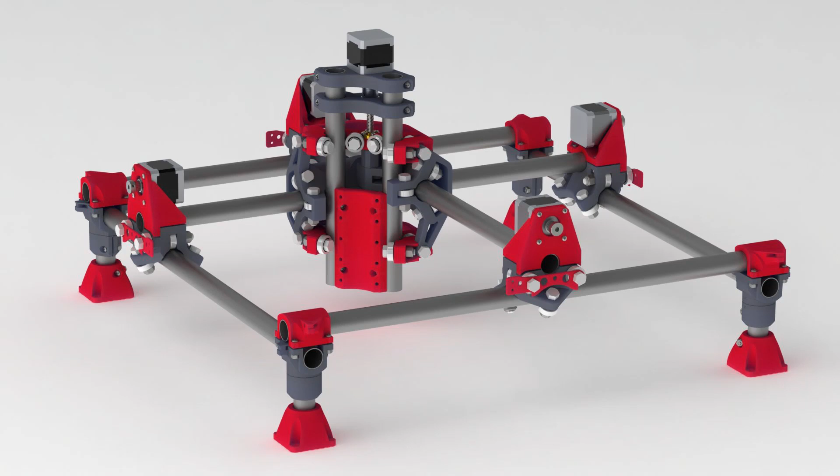This machine is designed by Ryan Zellars. He has an official website where you will find the full details and information about the machine and its parts. Also, you will find the forums for support by the designer himself and other community members around our machine.

Also in the website you will find other products like the Low Rider, the bigger brother for this machine. Also in the website you will find the store page where you can buy the 3D printed parts, electronic kits, or mechanical kits from there.

As in the title of this video, we will talk about this machine and what you need to know before you build your own machine.

I will show you first some examples of applications you can do with this machine, so you will have a wider view. The first example is the main usage for this machine, as the name says, CNC machine. So you can mill wood or other materials with this machine.

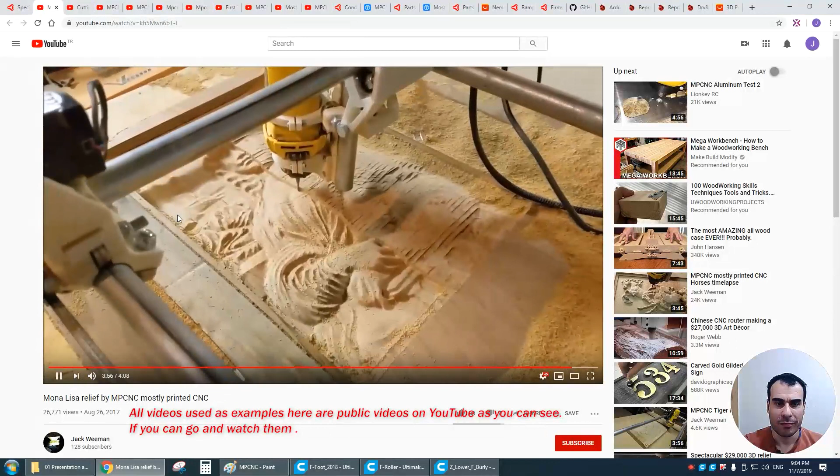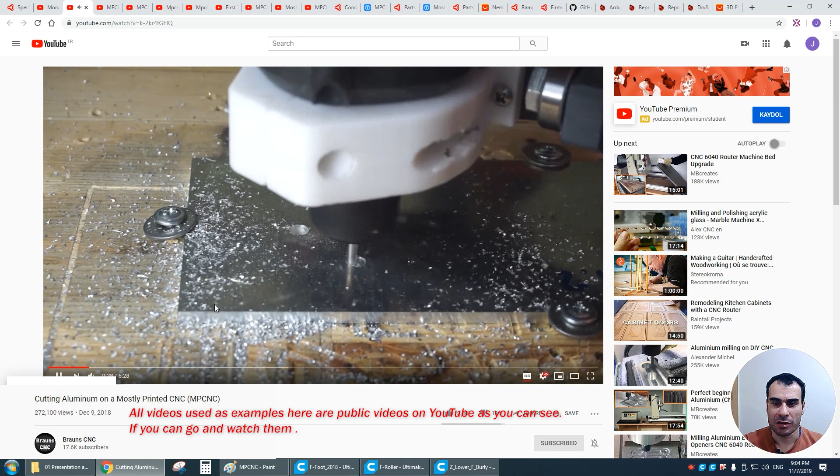I'll show you another example for milling. This example is also milling, but the material here is a sheet of aluminum. Also the machine is doing very well.

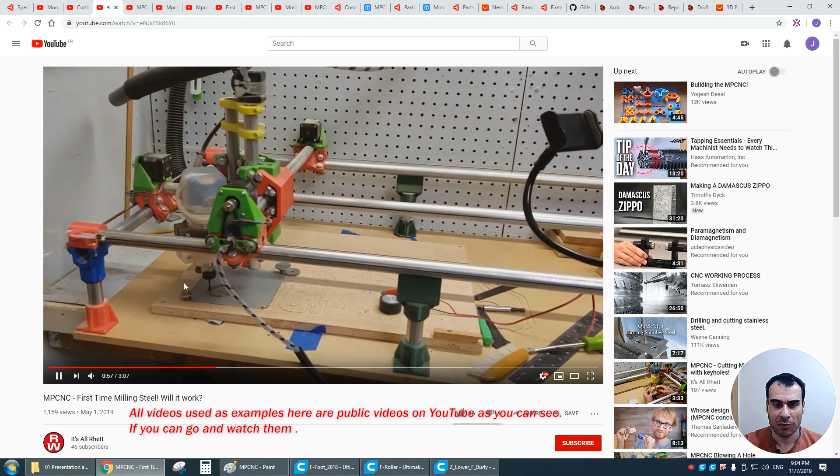We have another example for metal materials. Here the title says it's milling steel, and the machine is also doing very well.

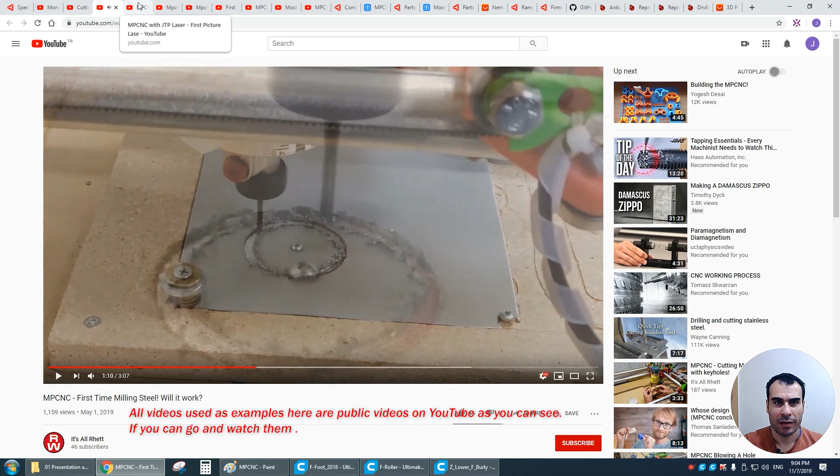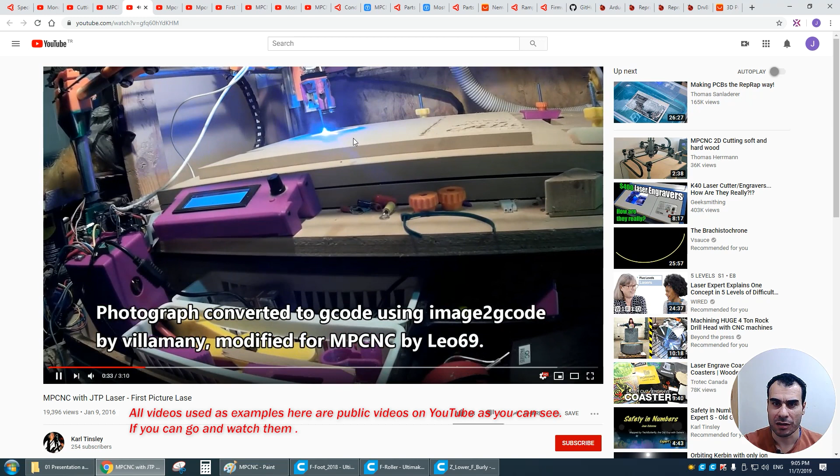We have another usage for the machine. Also the user here attached some laser diode to the gantry, and the machine is working as a laser engraver or laser cutter. We will have another example here.

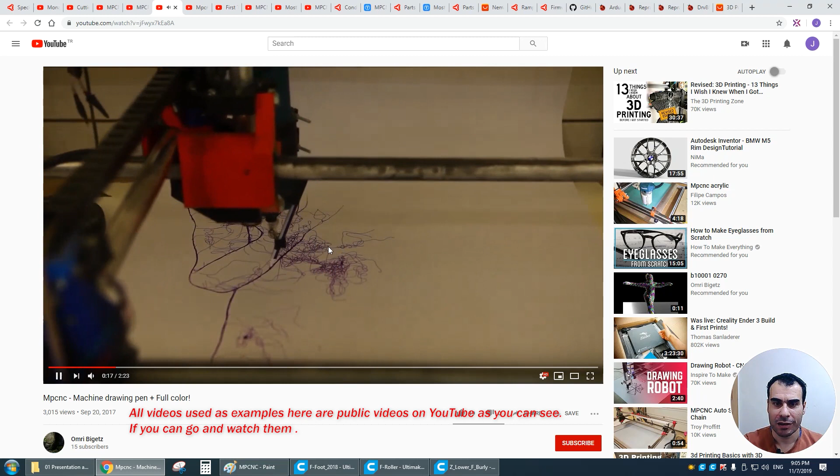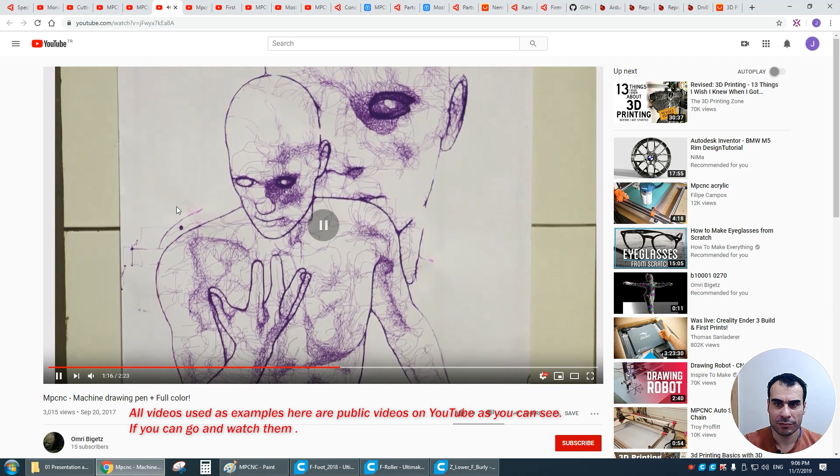The user attached a pen to the gantry, and the machine is working as a plotter or drawing machine. Here is another example for drawing. As you see, just attach a pen to the gantry and the machine works just like a normal plotter.

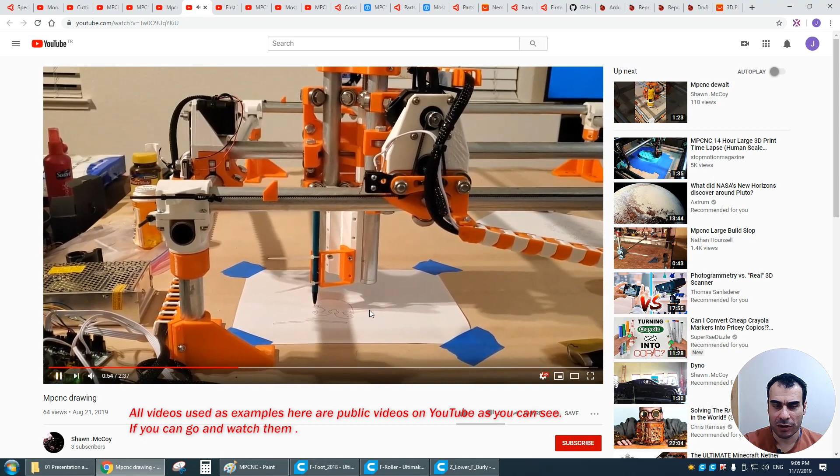For the G-code, the command set by the electronics, we will find it later in coming videos.

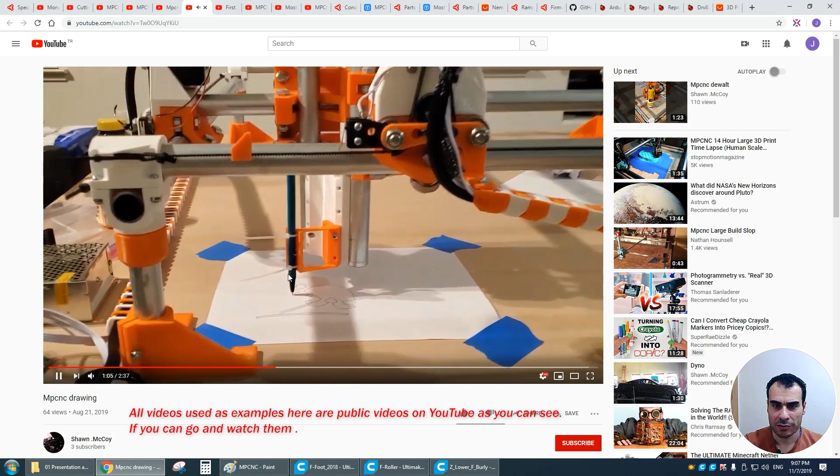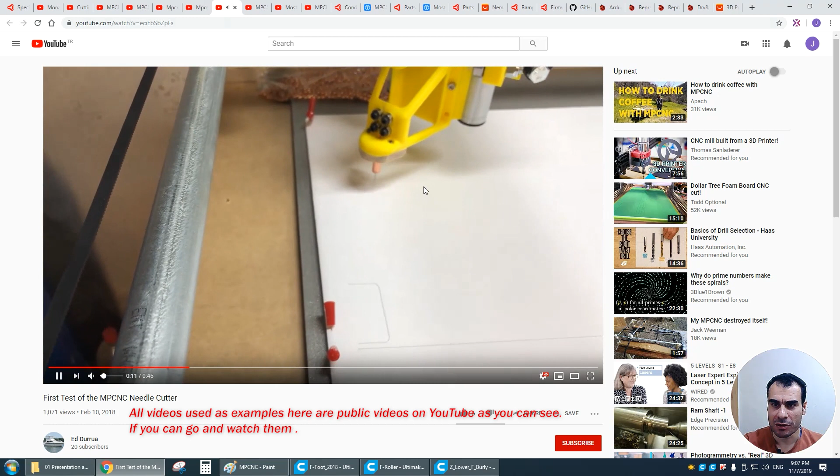Also, here we find the user attached some new invention in this community. It's called a needle cutter. Some motors, high-speed rotation motors with a needle attached to it, used to cut foams or soft materials like it.

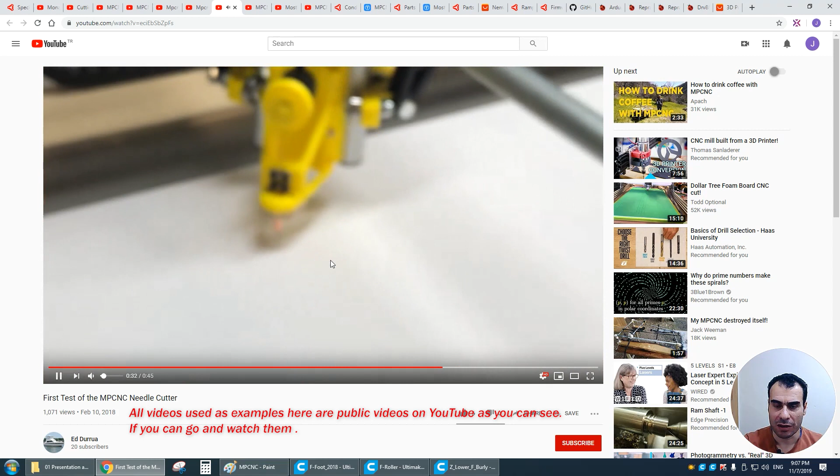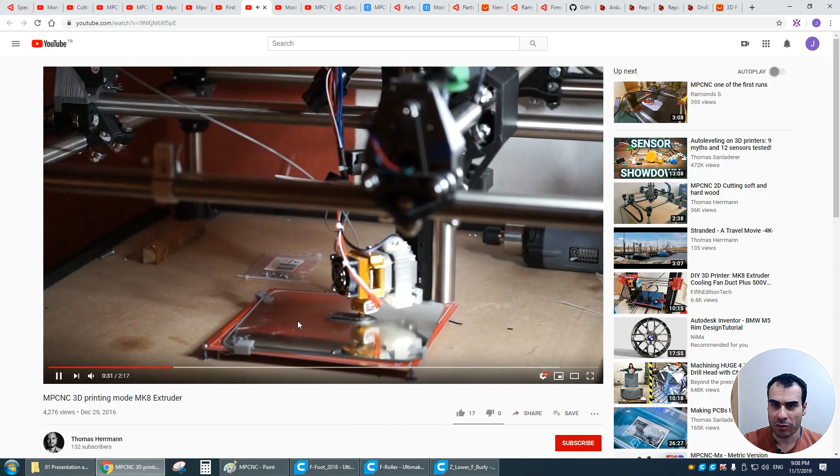Here we see that they attached a 3D printing head to the gantry, of course with some build plate. It worked as a 3D printer, a normal 3D printer.

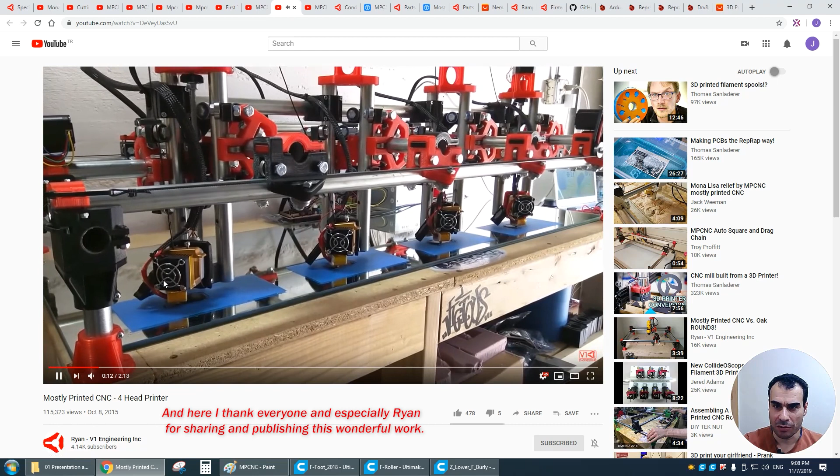Here in this design, the designer Ryan himself attached 4 heads of 3D printing to one machine, and it's a very genius solution to do continuous jobs like this.

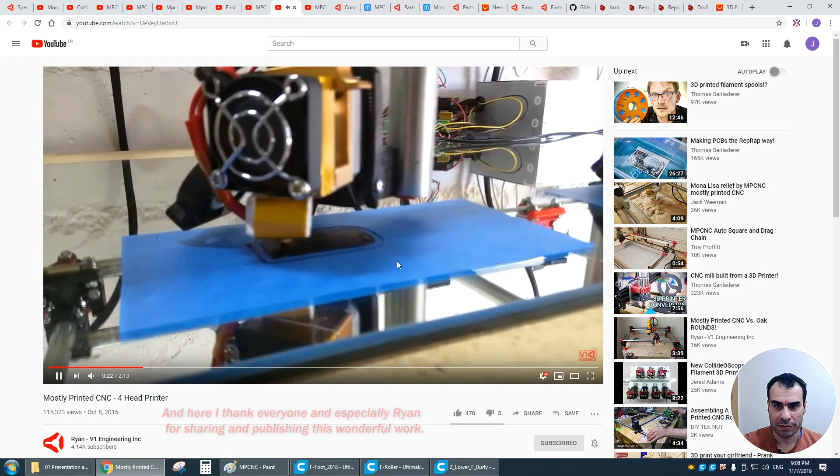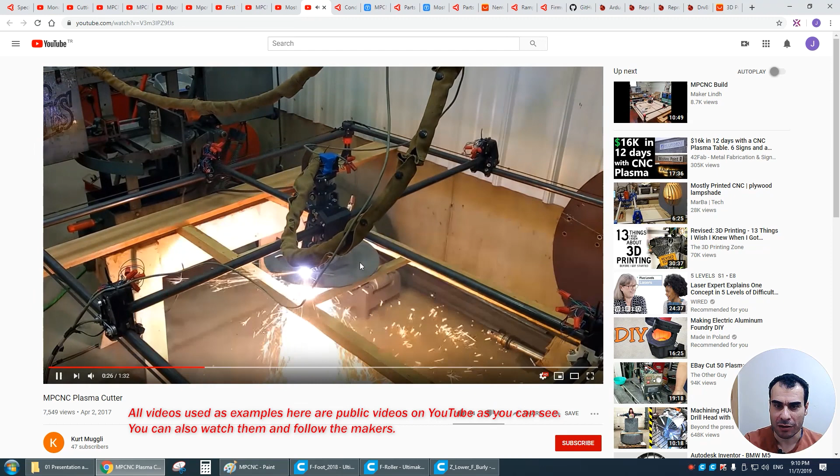He attached a plasma cutter to the gantry, and he is cutting the steel smoothly, like everything the machine is doing.

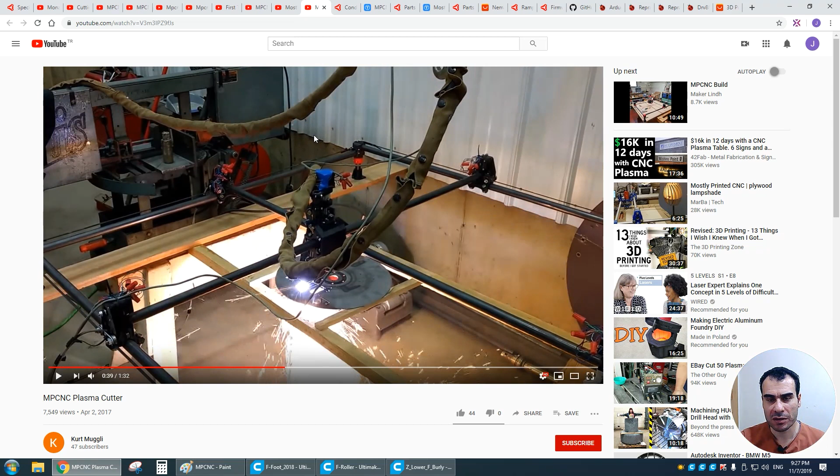Now we will talk about what we need to build a Mostly Printed CNC machine. In the official website, under the branch of Mostly Printed CNC or the MPCNC, you will find the whole details you need to build it.

We will start in the assembly page for the first item you need to know about: the conduits. Before we go further in the details, you have to decide what you are going to do with the machine. The build size is very important to know before you build your own.

For the dimensions and exact length of the conduit and other parts, we have to go to the cut calculator. This page, of course, you have in two systems, metric or imperial. I will go to the metric.

In this page, you just have to input the required workspace, and the calculator gives you the exact length of everything. For me, I need about 1200 millimeters in the X and Y, and about 270 on the Z axis.

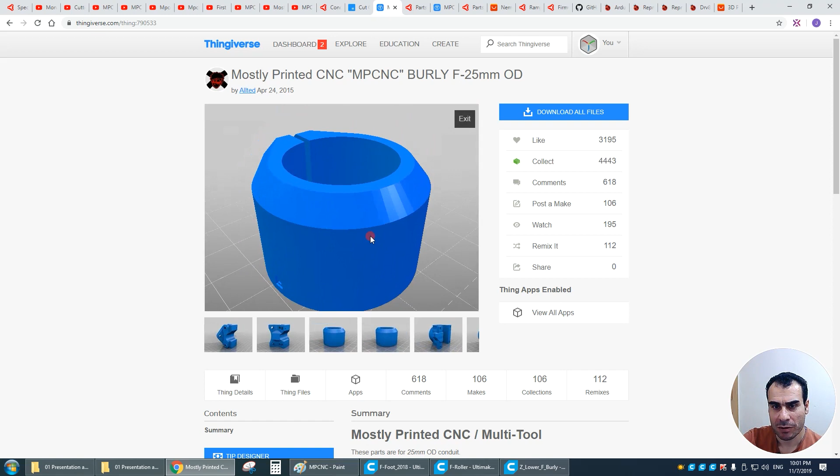Here I want to mention something I have been through. My 3D printer is the CR10S, and I'm very happy with it. But every time I'm printing with some new materials, I sometimes have wrong dimensions in the models.

So if it's possible, print some parts as a test. I'm recommending you go and print those parts. I will show you my settings on the Cura slicer and how I solved some problems I have. As you see, this is the foot part.

When I printed the first part, it came out really narrow. The tubes didn't fit inside it. So I searched on the internet and YouTube and found a very useful video.

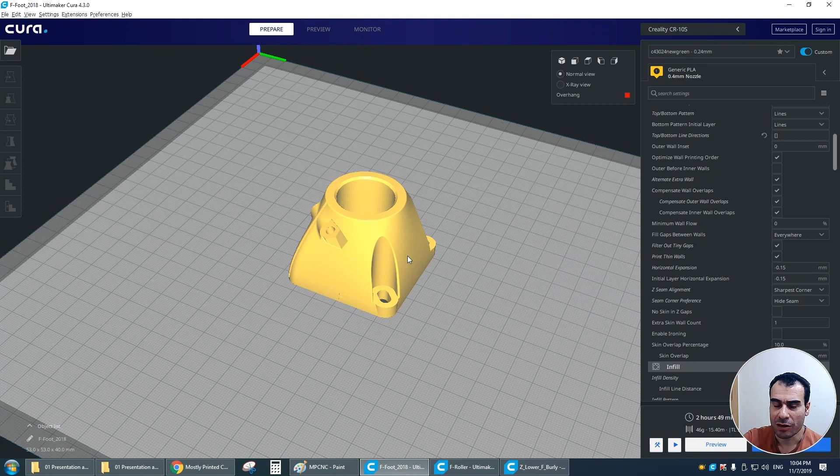The video explains that if the models come in wrong or incorrect dimensions, there's a setting called horizontal expansion, which gives the walls of the model some offset outside or inside. For this example, giving the horizontal expansion a minus value makes this hole come a little wider.

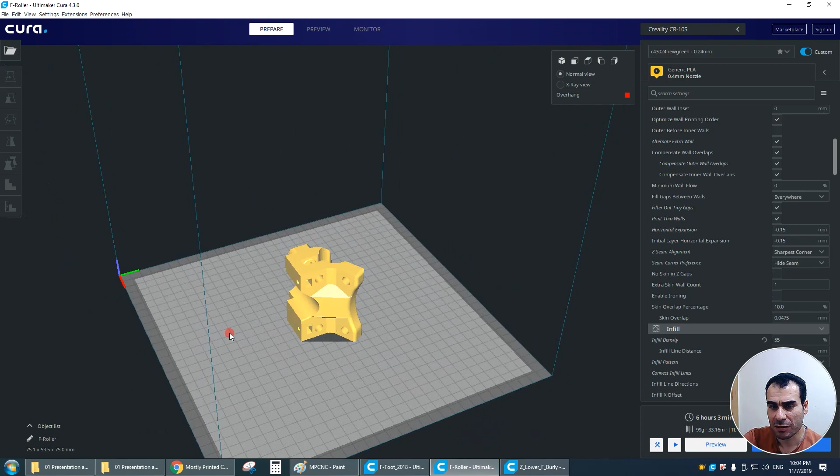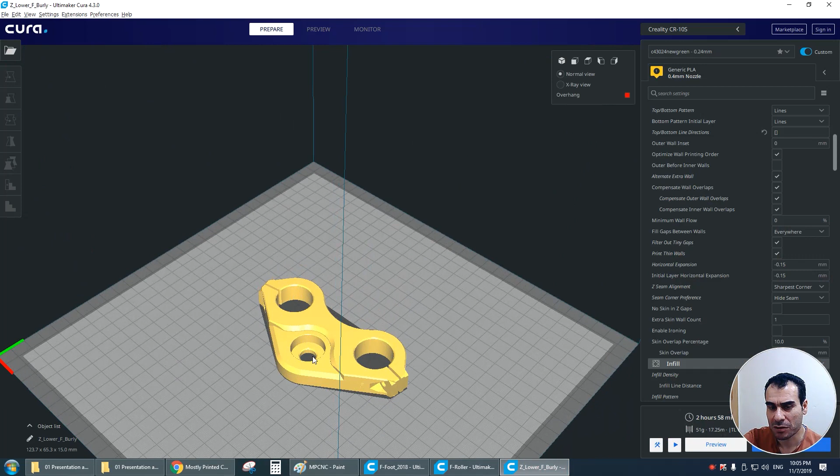So the tubes will fit inside. The F roller, if you print this part first, lets you test if the screws go inside the holes smoothly or not. Also the Z lower part for the tubes, if it fits or not, and here we have some place for the bearing, you can also check if it fits.

The designer has given some settings for the printing, for each part, the infill. Beside the infill, he gives you an approximate time for printing and weight. In total, you will print all the parts in about 120 hours, using a total of 2 kilograms of PLA.

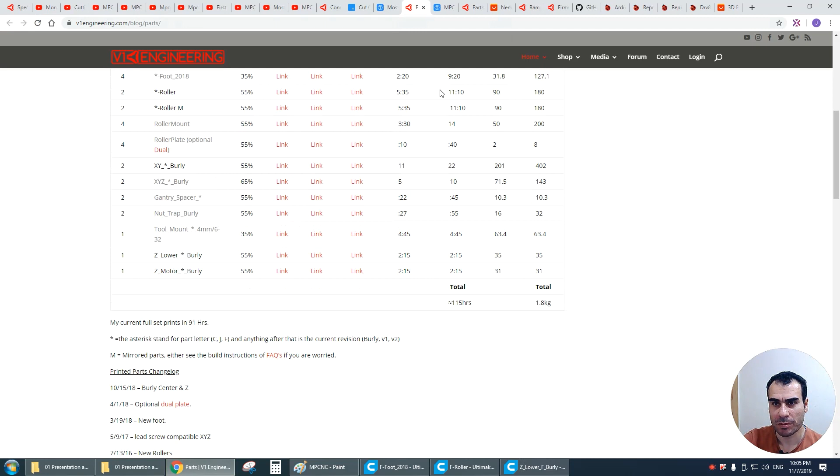The third item I want to talk about is the hardware part. It's not very hard to find in the local market. For me, I printed this list and went to the nearest hardware store and found everything there.

The fourth element I want to mention is the stepper motors. As you see on the official website store, they recommend the NEMA 17 with 76 ounce-inch. I couldn't buy it from the official website, and in the local market I also couldn't find enough information. After not long searching on the internet, I found a good deal on AliExpress.

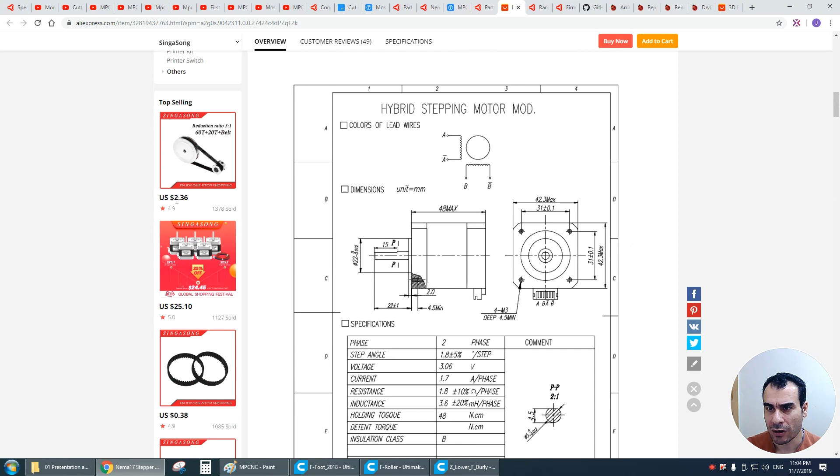I think it's enough for moving this machine. I have this kit of 5 stepper motors, and of course you need 5 of them for the machine. About the stepper motors, the NEMA 17 has a fixed dimension for width and length, about 42 millimeters. The only difference is the height, which determines the strength of the motor.

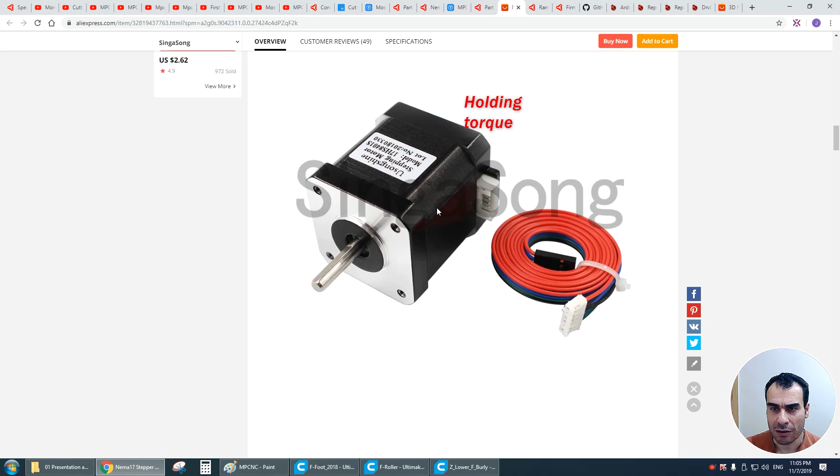The longest height is the strongest motor. For this kit, the height is 48 millimeters. Ignore the 74, I don't know what that is, but the height is 48, and it gives, as they say, 78 ounces per inch, which I think is enough.

With the current of 1.7 ampere, I think there's also a relationship between the torque strength and the ampere, but I really don't know what it is. For now, I think it's enough for what we are going to do with it.

The fifth element is the electronic parts. Of course, you will find the list on the official website. Here I want to talk especially about the control boards. The designer prefers to work with Marlin firmware. You can also control the machine through GRBL or Gerbil firmware, but I will go with Marlin firmware and suitable boards for that.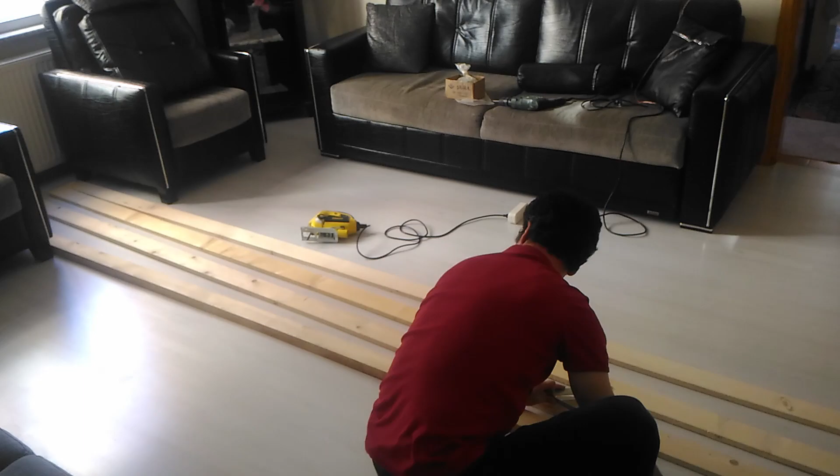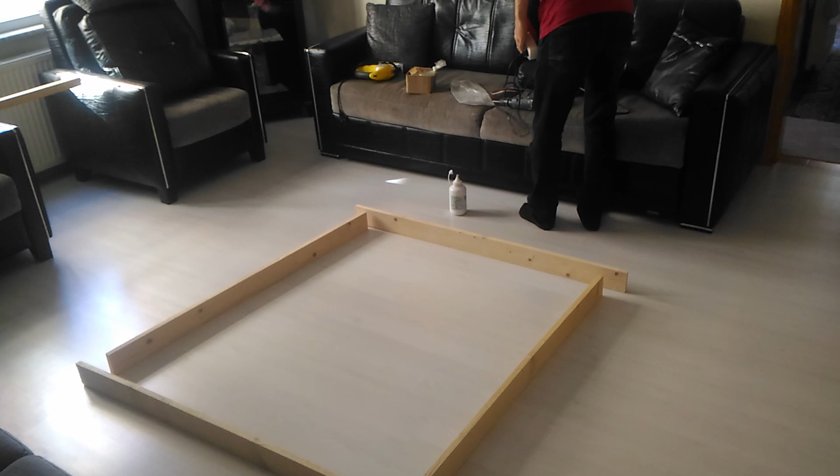I also want to mention the table and the space where you want to operate the machine. For me, I need to prepare something to get rid of the smoke and vapors which come from the laser cutting. Also, the table will be a really big build.

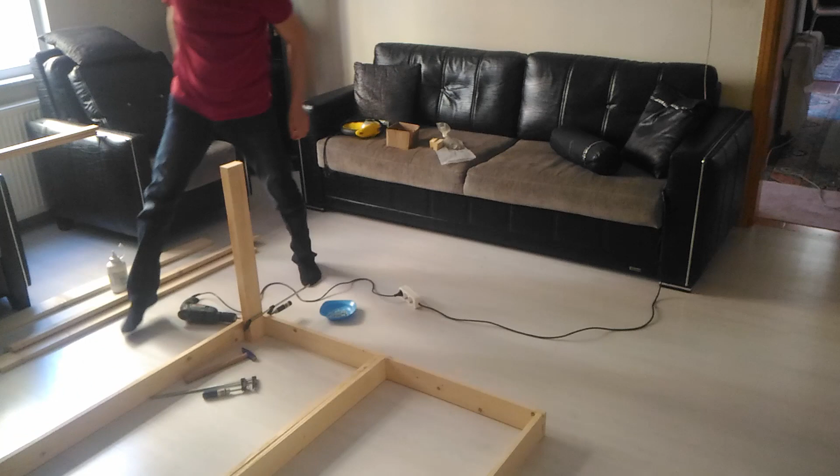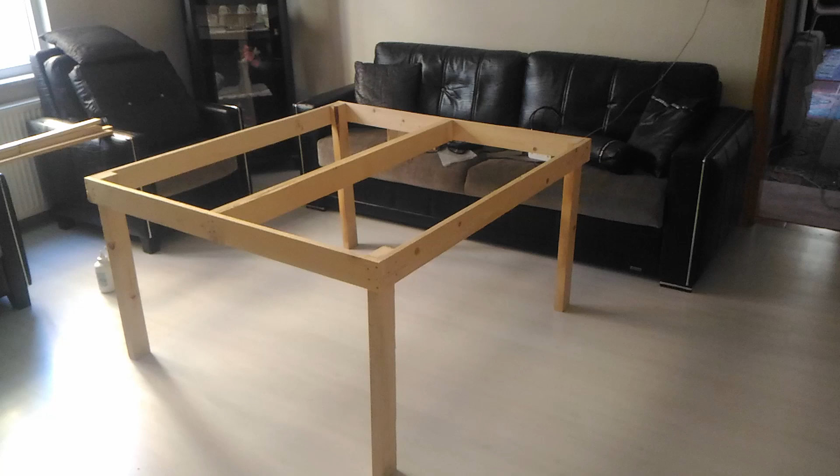For the table, I happened to have two pieces of MDF, which were two doors of an old cabinet. I bought the legs and the supporting bridge from a local store here. Obviously, I don't have woodworking experience, but what really matters is to provide enough space for the machine to work with low noise and low vibrations. Really, this is what matters.